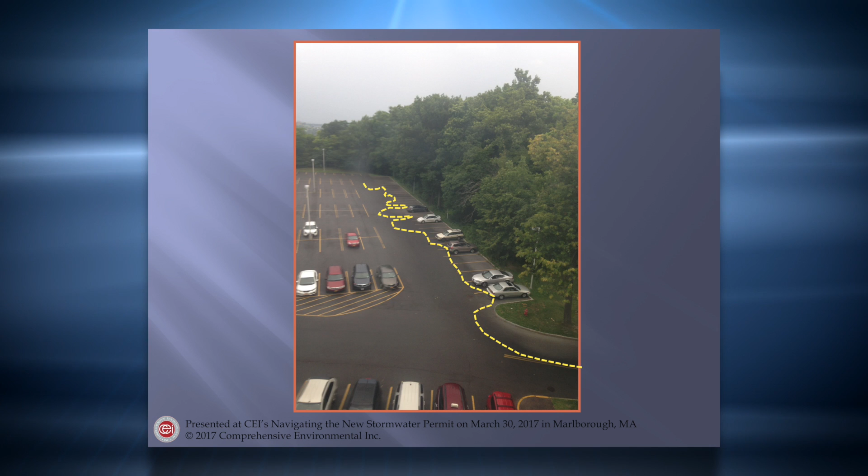I don't know if you can see it from the back of the room, but if you go out early in a rainstorm and get to the right vantage point, it's pretty telling. The drip line of the tree is quite obvious there, and you can see it at ground level here, the drip line of the tree. It stays dry in that pavement for some period between the onset of the storm and the onset of runoff. And what you're doing is you're saving up storage capacity in the pavement for later in the storm. When the storm really gets pelting, you're not saving much.

It's not going to do anything for peak rate control, but there's some extraction of runoff volume early in the storm and in small storms that could be significant if you totaled across the period of an entire year.

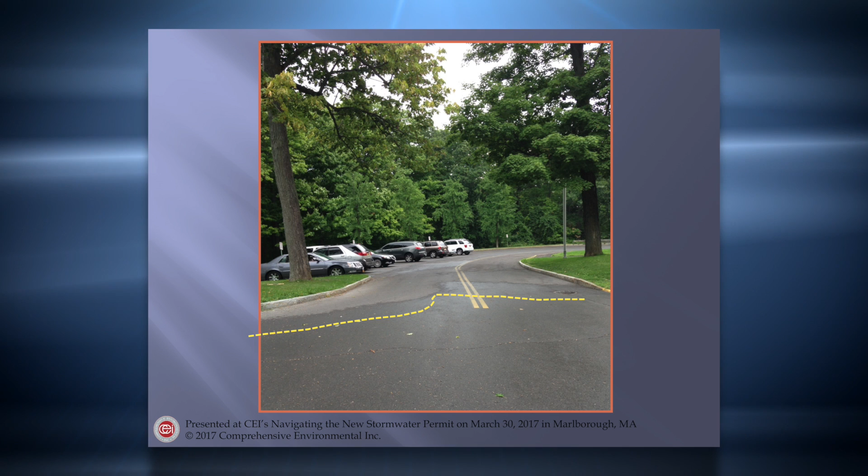So what we did was we proposed to the MassDEP a 319 funded project to look at whether trees have a benefit and could be used in proximity to pavement to offset some of the runoff that you end up having to collect over the period of a year. And if so, could we build that in, build some credits around it or some incentives to take advantage of this benefit of something that we like to have in the landscape anyway.

And so we looked a little deeper at some of the utilities and software available, and again, the USDA Forest Service, in concert with a number of partners that are involved with the management of urban forests, if you will, have put together a set of software and related tools called iTree tools.

And in that package is a software package called iTree Hydro, which is a fairly robust hydrologic program that takes into account pretty much all components of a hydrologic cycle above ground, at ground, and below ground, and enables you to take a landscape scale view of an area of interest and determine how the stream system is responding to the quantity of trees on the landscape.

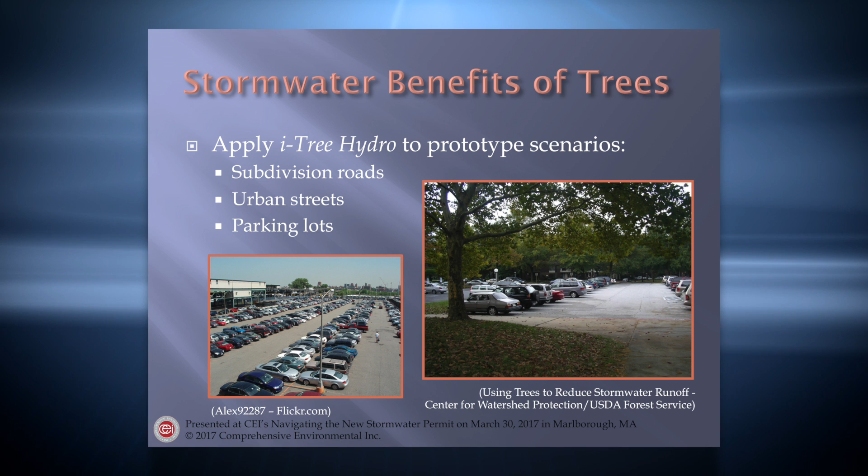And we fiddled with that model a little bit to bring it down to a very small landscape scale and look at some representative site scenarios before and after, without trees and with trees, what the trees' impact was on the runoff from the paved surface. And so we're taking this situation, comparing it to this situation, and some hopefully realistic design scenarios so that we could quantify what the effect of the trees was.

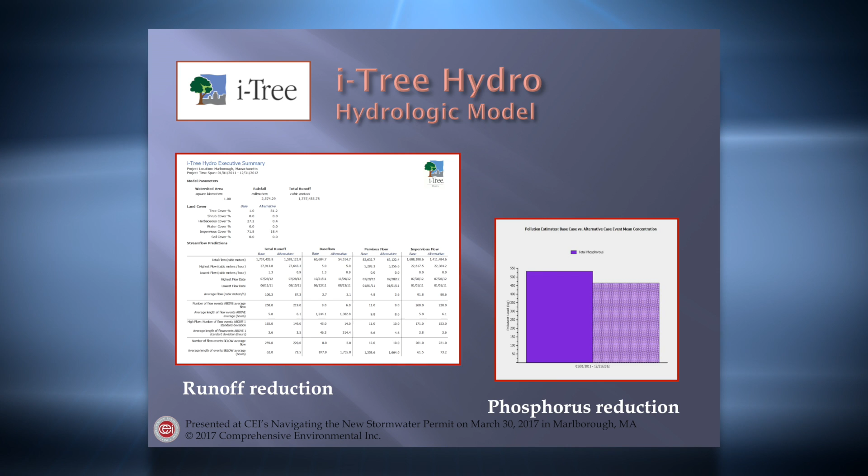For scenarios, the Metropolitan Area Planning Council, MAPC, has developed a guidance for basically environmentally friendly site design road standards. We used some of their road design scenarios and we populated them with trees at various intensities, if you will. Large trees on one side, where the other side's got utilities or something where you wouldn't be able to put trees. Smaller trees on both sides, big trees on both sides, just to get an idea of the range.

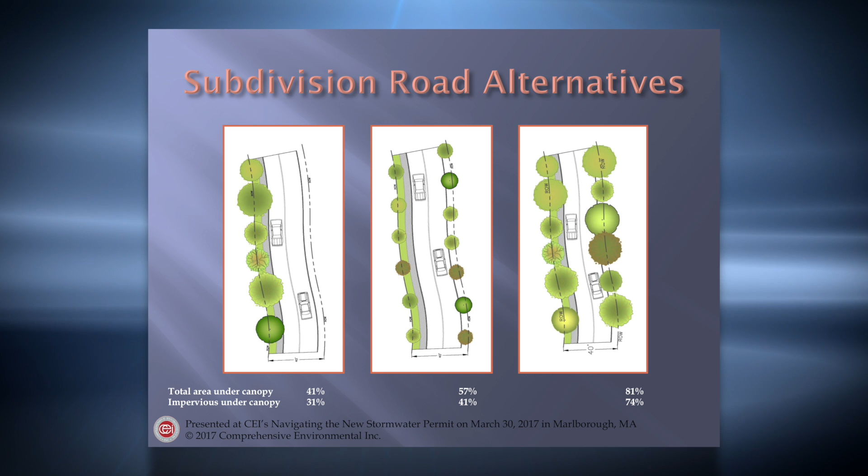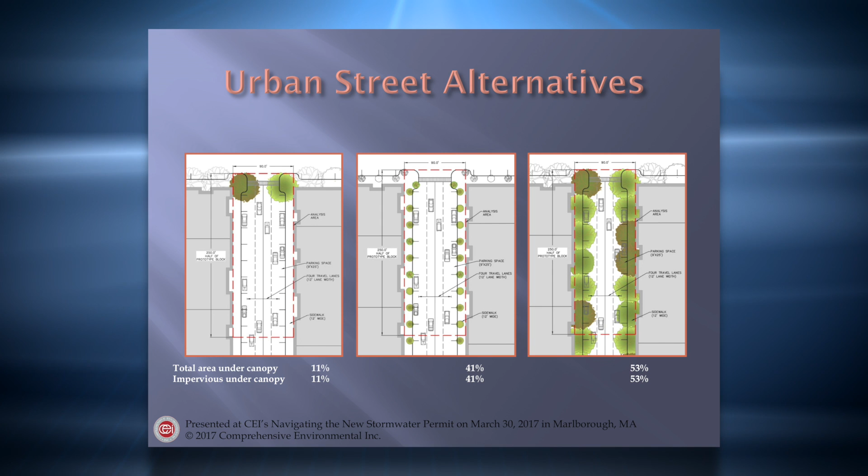We did a similar thing with an urban street, a 60-foot right-of-way, trees at the corners only, small trees on both sides, large trees on both sides, tallied up just what's within the right-of-way and beneath the tree, and up to 53% coverage. So a significant amount of canopy overhang if you can get these things to maturity, if. We'll talk about that later on.

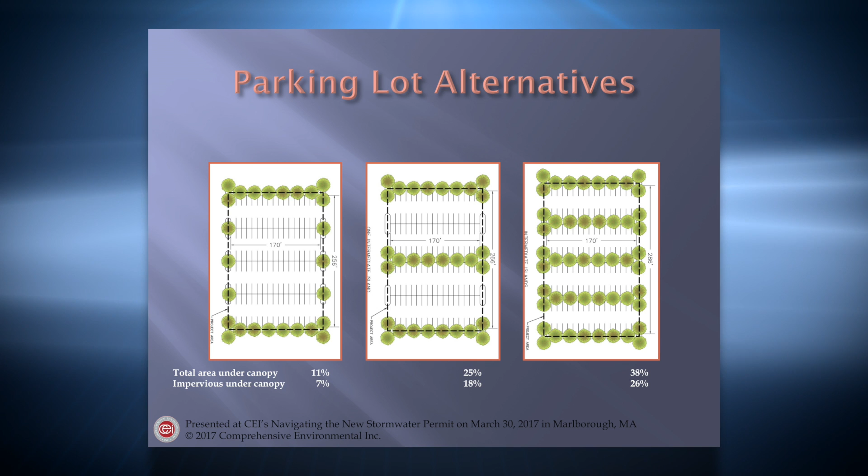So again, in all of these scenarios, you can get someplace upwards of 25, 30% or more in tree coverage without having onerous landscaping requirements compared to what we typically have in our regulations. Then we started looking at how the model is set up and sort of tinkering the parameters of each of these landscape scenarios to normalize them to 1 square kilometer or 1 acre or whatever, so we're comparing each one on similar parameters.

At the tail end of all this complicated process of doing a model, we came to the conclusion that in Marlborough, Massachusetts, you can expect that for any square foot of pavement that has leaves over it, you're going to get a 15% reduction in annual runoff. And it varies a little bit with where you go in the state because of the variation in rainfall and the rainfall pattern and intensity.

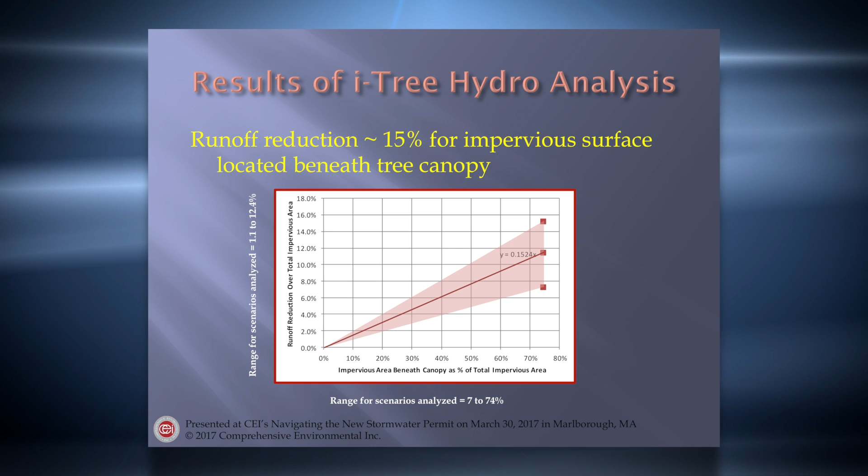Trees intercept a small amount at the beginning of a storm, or they intercept small storms. We talk about the first flush in stormwater runoff. This is like the first drip. But nevertheless, it's basically 15% of the first flush is what we're talking about here. Some variation depending on where you are, some variation with the type of tree, but 15% seems like a fair and reasonable figure given the overall precision with which we can analyze rainfall events over long periods of time.

And then the other thing, I keep saying the canopy overhanging the pavement. There's 2 reasons why I keep saying that. One is that the EPA regulations, the DEP regulations, most local regulations are based on a treatment standard that is equal to some factor times impervious area, or times connected impervious area. We're always treating runoff from impervious area. So we were looking at modeling this in a way that we can index it to that treatment standard.

We're treating from impervious area. We don't require treatment of pervious surfaces, or we don't count it as we size our system. So we're indexing our approach to the regulatory approach, which deals with paved surface. The other thing is if you look at these small storms, the amount intercepted by the tree would happen even if the tree wasn't there. Grass, shrubs, whatever, would be able to intercept the same amount of rainfall in those small storms.

The disadvantage of shrubs and grass is that they don't overhang pavement. Trees do. And some trees do if you're going to use them as part of your stormwater management system, because you're not going to plant a conifer here with a shape like this, because you would have to come and limb up the branches that are doing the work, and they wouldn't be providing you any benefit.

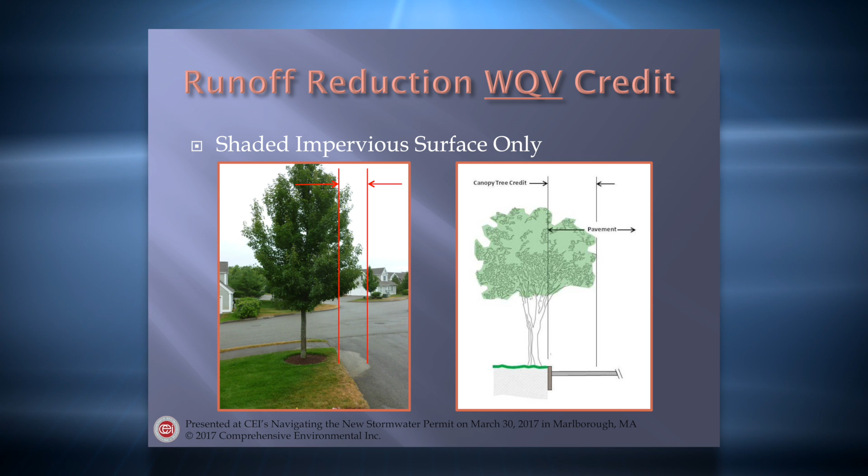So the thrust of this study was to look at, is there a benefit? Yes, there is. Is it really big? It's not really big, but if you're talking about the new MS4 standards, for instance, which are requiring retaining 1 inch of runoff, that 1 inch could become a little less onerous if you could take 15% of it off the front end by having the tree overhanging the pavement and catching the rainfall and letting it evaporate for those small storms and the beginning of the storm. So a lot of our stormwater design work is working with a whole bunch of different measures to try to make the job easier for us in the end to treat what's left.

So we would count this along with pavement disconnection, which is directing your flow onto qualifying pervious areas where it can infiltrate, and other low impact development devices and strategies in your toolkit to bring the total volume of stormwater down that you need to use high intensity BMPs and expensive BMPs to treat. So every little bit helps.

Can we get 15% off the front end by letting trees overhang our pavements and providing incentives to do that? Keep existing trees, plant new trees. So we're looking at this 1 inch or the 0.8 inch for redevelopment as sort of the threshold that we're going to try to bring down and provide developers or communities with incentives to keep or plant new trees to make their job easier when it comes to designing the BMPs that they're eventually going to need.

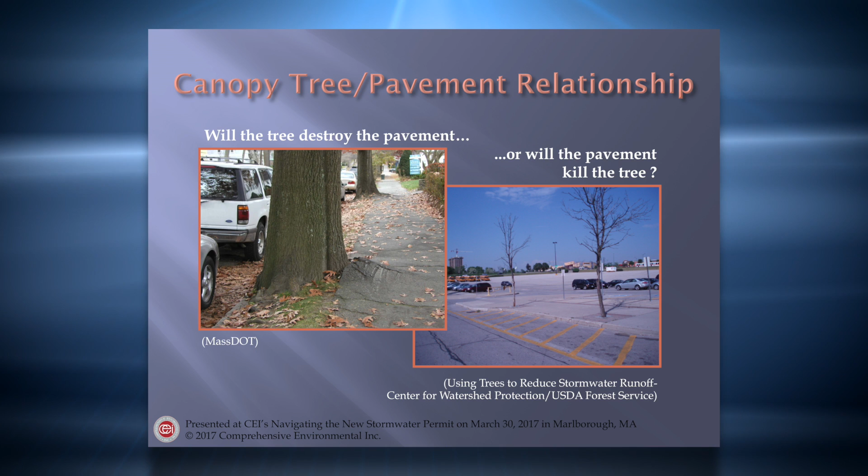I'm going to come back to this canopy versus pavement relationship. Two sides of the coin: will the tree destroy the pavement? Will the pavement destroy the tree? And this idea of tree canopy versus soil volume. Presumably, all these trees were planted at the same time. Look at the ones in the middle. They're in little teeny tree pits. The ones around the edge are in this nice wide landscape strip, lots of place for the roots to stretch out and to obtain the moisture and nutrients that the tree needs.

There are ways to provide those trees in the middle with greater soil volume and access to this moisture and nutrient. But it wasn't done here. But this is what happens if you don't. These trees in the middle will reach a certain canopy diameter and they'll just cease to thrive and possibly even die. As a matter of fact, statistics indicate that the average life of a tree in an urban setting is 7 to 10 years. And the primary reason is because it does not have a place where the roots can extend to mimic the drip line of the tree.

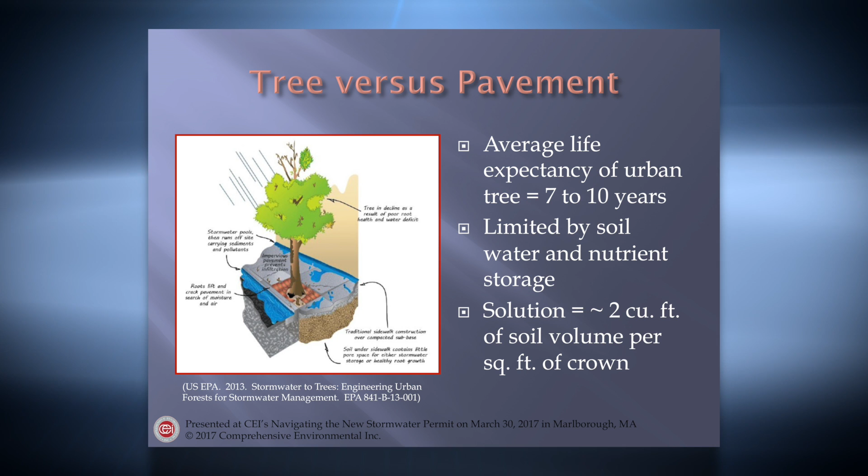The rule of thumb is you need 2 cubic feet of soil volume for every square foot of canopy footprint that you have. And when you do that calculation, a 4x4 foot tree pit is just not going to do the job. You need something more like an 8 by whatever the spacing between trees is, 30 feet. It's like 250, 350 cubic feet soil volume. So you need to provide for that as part of the installation of the tree, or you might as well seek another BMP. Read into that: if somebody's proposing a tree box with a bottom on it as a treatment mechanism, you've got about 7 to 10 years worth of tree growth to depend on. Plan on replacing it or plan on another BMP, because you need the roots to have some place to go without destroying your pavement.

There are ways to do this beneath pavement, basically suspending the pavement on some kind of structural system that allows the roots to penetrate without destroying the pavement. There are proprietary soil mixes that can be done, or you can simply provide decent linear landscaping islands, for instance, in parking lots or on the verge of pavements that allow for the soil volume. It doesn't have to be circular or whatever, it just has to be there in some direction.

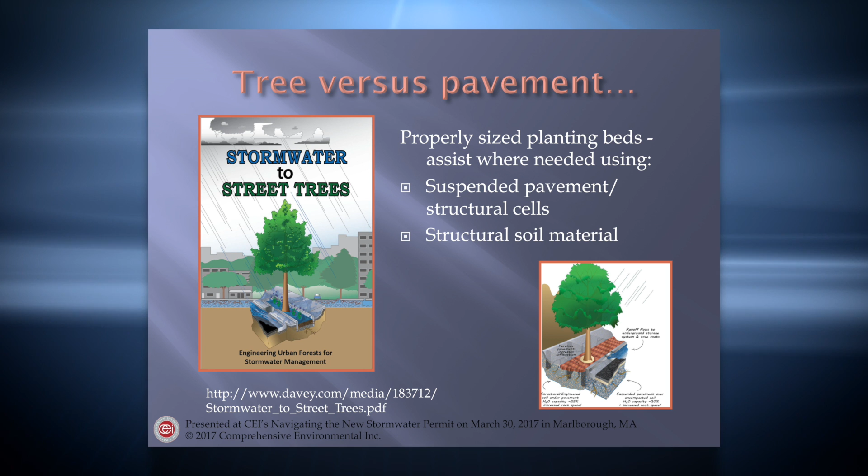So we've developed some ordinance language to build this in that includes these provisions: prevention of future removal, replacement as you need, maintenance as you need, and then because you're going to lose the leaves, and we're talking in many cases about dealing with phosphorus, we don't want that phosphorus sitting in the gutter to be washed away after you've taken all the trouble to take it out of the system, so you have to have it coupled with a street cleaning program that's appropriate.

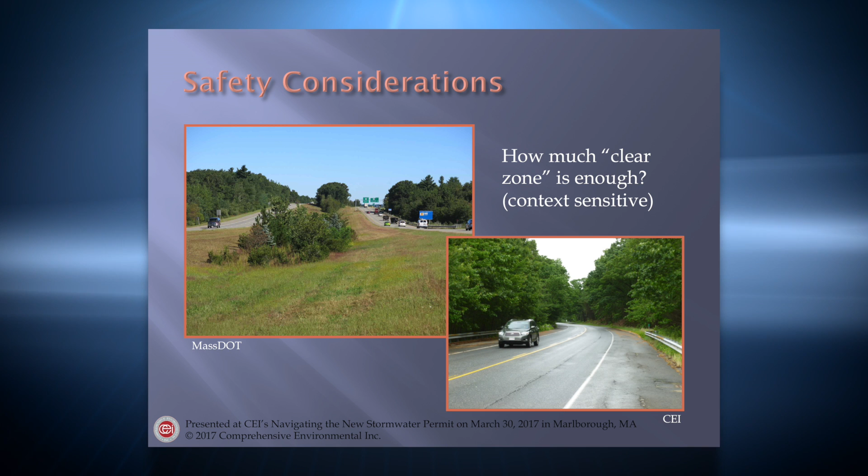And then just very quickly, safety is a concern. This is context sensitive. Depending on the road, you may not want trees right next to the road. Take a close look. And I've already talked about the nutrient management issue. We need to attend to the collection of phosphorus that we've accomplished by this BMP. And that's my story.